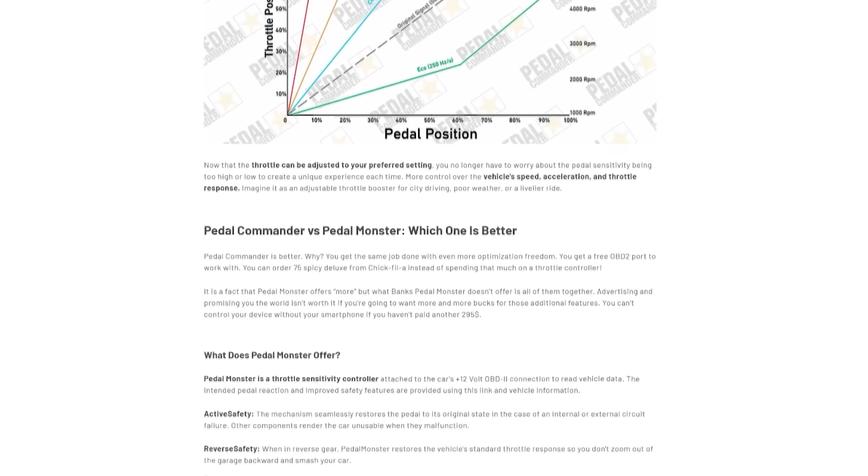And that's where the similarities end. Let's take a look. Well, first thing I notice is he's trying to make this look like an impartial comparison on his website, like it's Car and Driver or something. He's listing our features and their features.

All right, game on. So reading down their page, I come up with this: it is a fact that PedalMonster offers more. Well, now there you are. He's acknowledging it. Absolutely, it is a fact that PedalMonster offers more, but what PedalMonster doesn't offer is all of them together, whatever them is.

Okay, advertising and promising you the world isn't worth it if you're going to want more and more bucks for those additional features they come with.

It's all for $295, including the phone app. Oh my God, what is he talking about? You can't control your device without your smartphone if you haven't paid another $295.

You're going to control your device with your smartphone. That's what we do today.

What is this? You can order 75 spicy deluxe from Chick-fil-A instead of spending that much on a throttle controller.

For $295, you get PedalMonster limited only to your smartphone for control. Only if you pay another $295. This is English as a second language. He's got the dollar sign after the number.

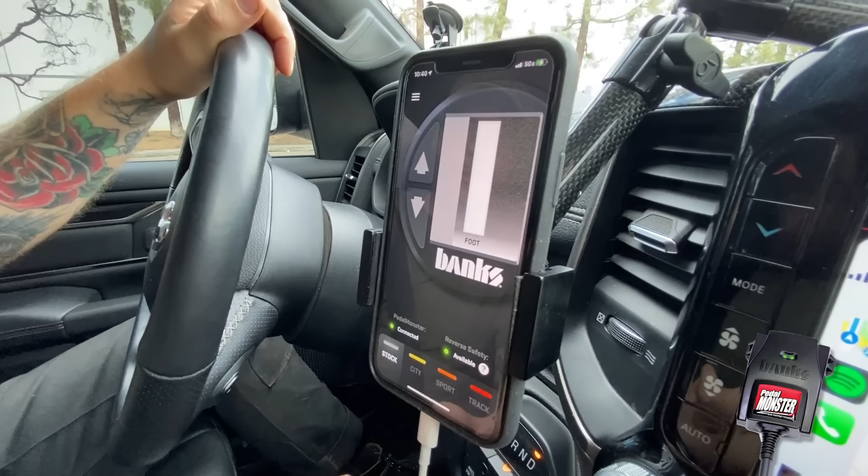I think this whole diatribe has to do with the fact that they've got buttons. So to get to the buttons, this has to be glued to your dash somewhere. We chose not to have buttons, so you wouldn't have to plaster this thing to your dashboard. It's hideaway. We chose to control it with your phone or with an iDash, your option.

These guys are jackasses. Most users choose Pedal Commander over PedalMonster because it is much easier to install. That was bullshit.

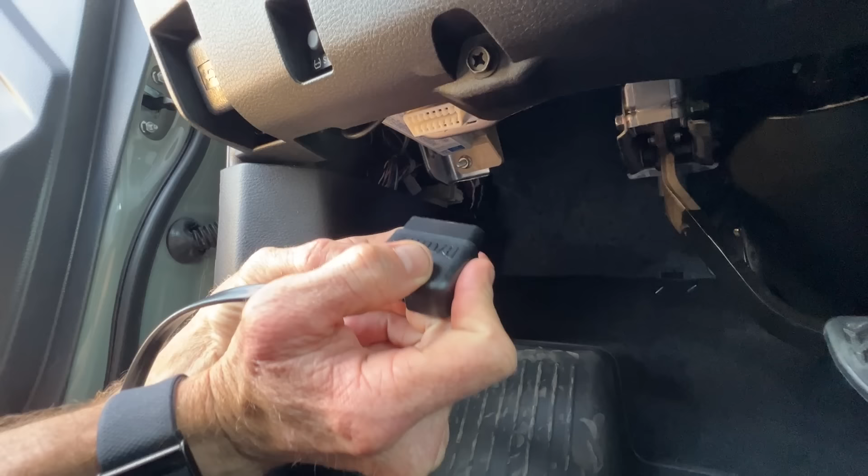Pedal connection, OBD connector, looks pretty simple to me. With PedalMonster, you must route the included long OBD2 cable to a place where it won't snag, which is a chore, they say. Pedal Commander is much easier to install. The installation of this whole damn thing is probably 8 to 10 minutes. If plugging in an OBD cable is too much for them, I'd be worried about the circuitry in their box.

So reading down their page, I come up with this: Pedal Commander is better. Why? You get the same job done with even more optimization freedom. What the hell does that mean? And you get a free OBD2 port to work with. That's not an advantage.

Why is OBD such a big deal? Well, OBD gives us reverse safety, returning the pedal to stock when you're in reverse so you don't back through the garage door. I bet you they purchased some garage doors for their customers. To the highest notches. Whoops. Yeah, it might be a little dangerous.

The fact that we're on the OBD connection gives us vehicle identity, so we know year, make, model, transmission, on and on and on. This allows us to fingerprint the vehicle we're on. Now we can have a custom calibration for your specific car or truck. And if you want a free OBD port, we've got splitters. They're easy.

OBD also gives us low-speed trim, so you can limit PedalMonster sensitivity below 10 miles per hour. This is great for preventing wheel spin, and it's wonderful for towing. This guy has no OBD connection. It doesn't know what it's in. Hell, you could probably connect it to a riding mower. It wouldn't know.

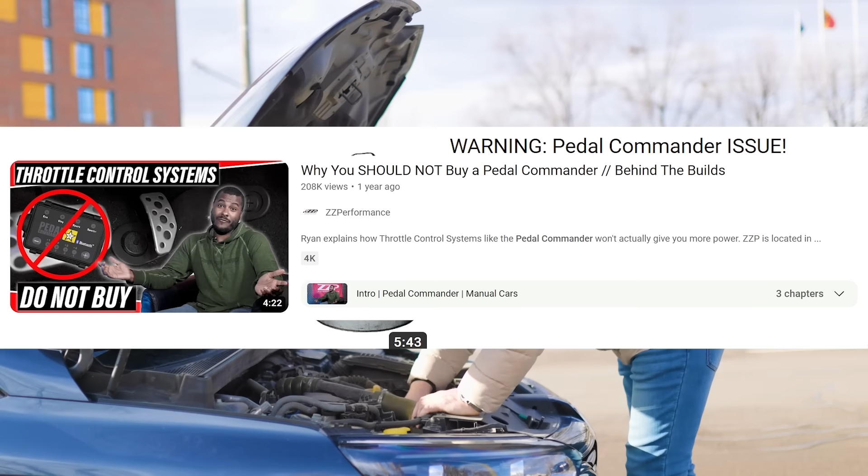When we first came into the market, we saw that these guys were getting all kinds of comments online about kicking trouble codes. Why was that happening? We bought one and found that they're leaching 5-volt power off of the instrumentation circuit, and there's not a lot of current overhead there. So we decided to go to the OBD connection and get fused 12-volt power right from the battery.

Let's read on: Pedal Commander doesn't cause voltage shorts. Only small amounts of milliamps are being used. Your throttle would still have plenty of overhead power.

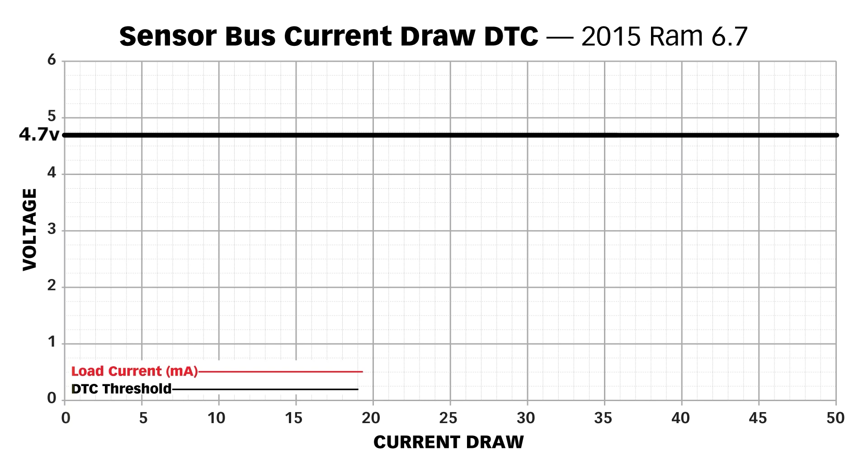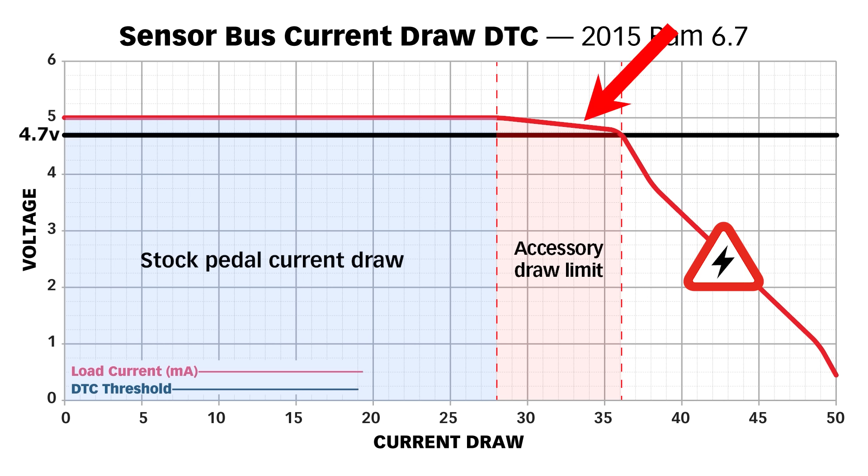Milliamps? Let me talk you through this graph, I think it'll help you understand what's going on. The blue area is the stock current draw for your pedal assembly. The pink area is the draw limit, and the white area is circuit overload. The black line indicates the voltage required to operate the circuit, about 4.7 volts. The red line indicates the voltage available to operate that circuit. Everything's happy here until you get up to about 28 milliamps of current flow, which is all the stock system draws, and then the voltage starts nosing over. Then along comes Pedal Commander, and they push the current draw beyond the safe limit.

So if you don't believe our test results, maybe you'll believe their customers.

This happened at the exact moment that I changed from city to sport mode on the Pedal Commander. I have no idea what this thing is doing, it's like it's accelerating on its own. We've got the check engine light on, the truck just said engine power reduced. Maybe this Pedal Commander wasn't a good idea.

I'm parked right now on the parkway. I almost crashed, you can see the cars coming. I kind of got scared because the car was not responding to my foot. It's definitely connected to the Pedal Commander. Just one scare like that is enough, and more than that, your life could have got ruined.

My truck just flashed every warning light, check engine light, throttle position sensor. I am never putting this back on the truck because that was super scary.

You start setting trouble codes, the ECM deactivates your pedal, you're coasting in the fast lane, you come to a stop, and you get nailed from behind.

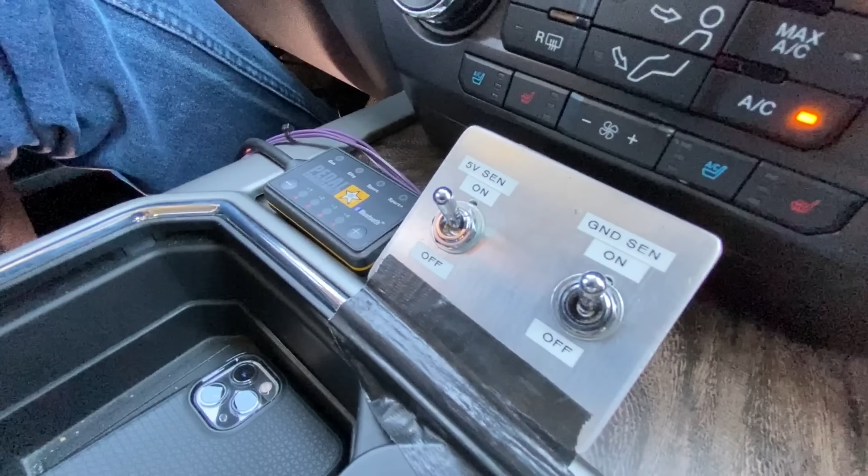To be thorough, we tested this failure ourselves. The guys rigged one of our trucks with a pair of kill switches, one for the 5-volt pedal circuit and one for the 12-volt power from the OBD connector. Now we can kill the power to both the Pedal Commander and PedalMonster to see how they respond. Here we go.

Get up to about 30, still accelerating. Hit the switch. Nothing. Engine's gone to idle, there's no pedal whatsoever. Hill descent fault — what the hell is hill descent fault? Service? What about service, see the manual? Oh my God, oh, nothing.

All right, we've changed to the PedalMonster, here it is right here. Internally on the circuit board, we have a 12-volt to 5-volt DC power supply that powers the entire circuit board. So let's see what our watchdog circuit and our active safety is all about.

Here we go, we're going to accelerate to about 30, and I'm going to kill it. And here's a guy who's thinking about pulling out in front of me. Kill it. Whoa, I've still got throttle, still punches. All right, PedalMonster off, on, off, on. Well, there you are — that's what active safety, that's what Watchdog, and that's what failsafe is all about.

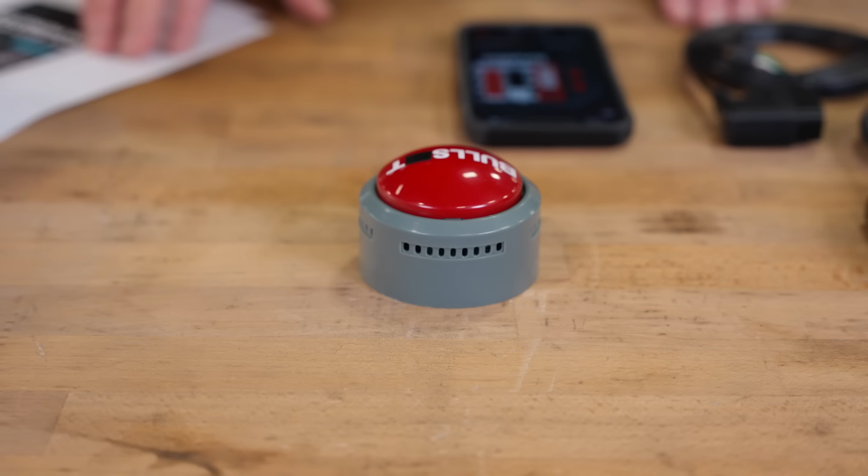So let's bust them apart and take them into Rick in the lab.

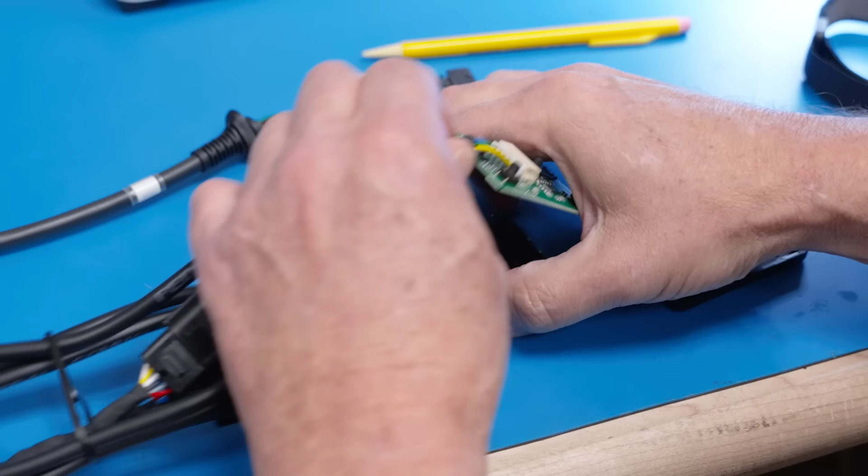So we've opened up both of these units. I have the Banks PedalMonster on top and I have the Pedal Commander on the bottom. I want to show you some of the differences between these.

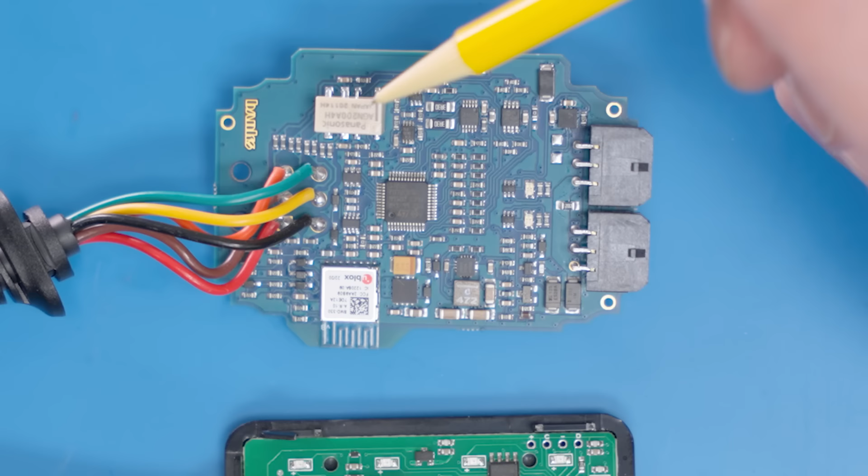One thing that stands out is we have this relay here, this beige box. This gives us a great safety feature, a positive failure mode. This active safety mode is very important. If this board were to fail, this relay will close and revert to stock operation. Looking at the Pedal Commander, I don't see any such feature. There's no relays, no passive safety, no active safety. When it fails, you're in danger of losing your throttle pedal.

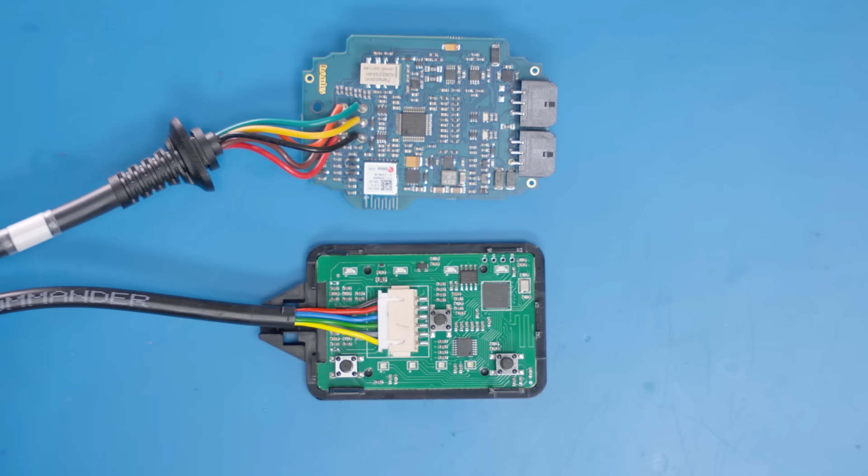Looking at the PedalMonster, you can see we have a CAN bus interface IC right here. The CAN bus is the controller area network, the data bus inside your car that runs the entire vehicle. Because we interface with the CAN bus, we have a lot of intelligence in our module. It knows the type of car, the year, the make, the model. It knows what transmission, what engine, what gear you're in. These are great things to know.

For example, if you put your vehicle in reverse with the Banks module, it reverts to stock performance so you don't lunge backwards in reverse. The Pedal Commander has no such CAN interface and therefore has no idea what gear you're in or even what type of vehicle you're in, or if it's even in a vehicle. From an electrical engineering standpoint, there's no comparison between these boards. The Pedal Commander is simply inferior.

What is the cost? Ours is $295. I assume they're probably undercutting us, selling it for around $200. $299? Wow. The point I'm trying to make is the most elemental one: this is cheap to make, this isn't. Hello, what is this?

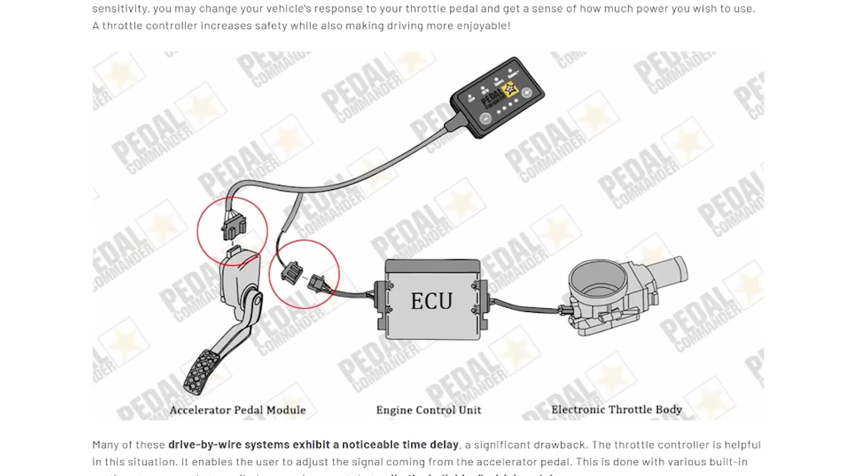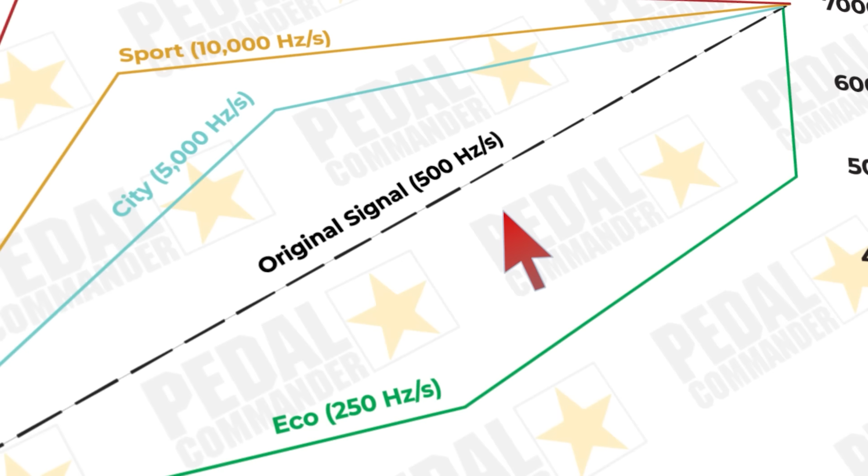What is this little graph on the page here? I got to put on my cheaters. Okay, it's pedal position to throttle position. It's a graph showing 0 to 100% pedal position on the bottom, and 0 to 100% throttle position on the left side. This dashed gray line is apparently the original signal, and it says 500 hertz per second. That's English as a second language all over again. That's 500 cycles per second per second. We just say 500 hertz. If you're going to say hertz, say hertz.

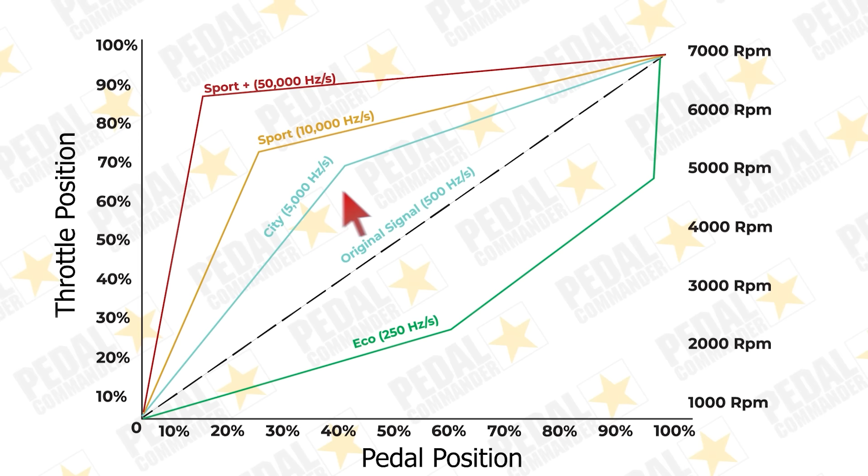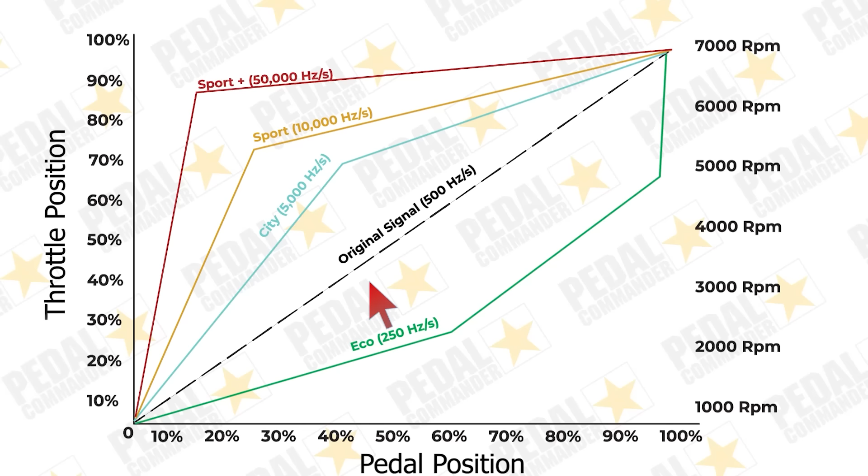But why are we describing an electrical 0 to 5 volt signal with a frequency in the first place? What does it say about City on their web page? 'Gives you a more active linear throttle response, perfect for everyday driving. This offers you a response of an old school throttle cable, a 1-to-1 pedal to throttle acceleration ratio.' Okay, 1-to-1. Well, he just described the stock trace that he's got on here, which is basically 1-to-1. The City mode is not 1-to-1. It's a different ratio, if you will. No way it's 1-to-1. God.

Now let's look at sport mode. Sport is way more aggressive, you can see that. How do they describe it? 'Our spirited driving mode, not for the light-hearted. This is our highest suggested mode for around town driving. 70% faster signal than stock.' Oh, I get it, that's what this frequency is all about. Like they're speeding up the speed of light or the speed of the electricity. You can't change the speed of electricity, period.

Warning, bullshit alert. All right, looking at sport again, there's no smooth transition, these are not contours. These are brutal, straight line, a knee or transition point, then you're putting your foot into the bucket of mud all the way to 100%.

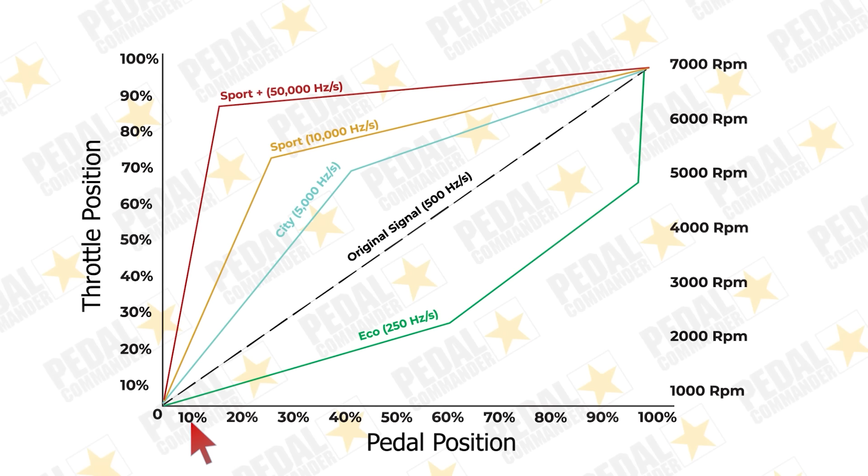It really gets good when you get to their Sport Plus mode. You've moved the pedal 10% and you've got 85% of the throttle opening. So from 10% to 100% pedal, all that additional 90%, you're only getting 15% more throttle opening. You basically touch it and you're all done. No way you call this a curve. You get to that knee, and let's say you're pulling a grade. If you're at or around that knee in the throttle response, I'm telling you, you're going to have shift happy in spades. God forbid you've got a Toyota Tacoma going up in the mountains with a Pedal Commander. You guys know what I'm talking about.

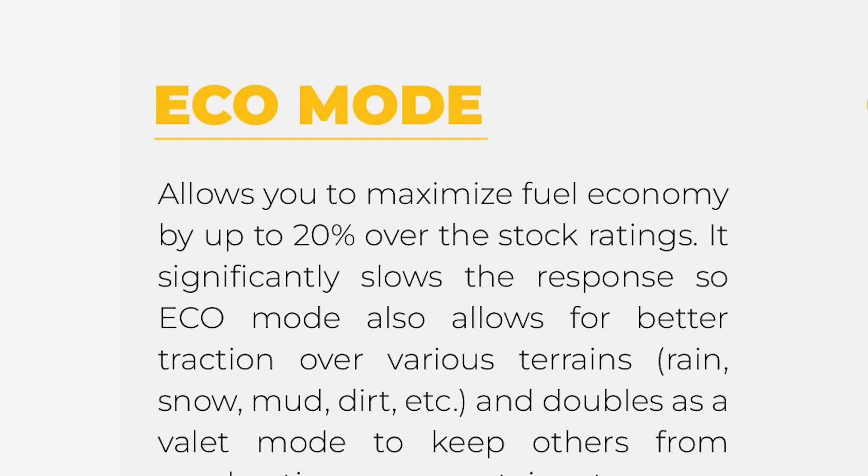Now let's look at the green trace. Eco mode allows you to maximize fuel economy by up to 20% over stock ratings. No damn way, that was bullshit.

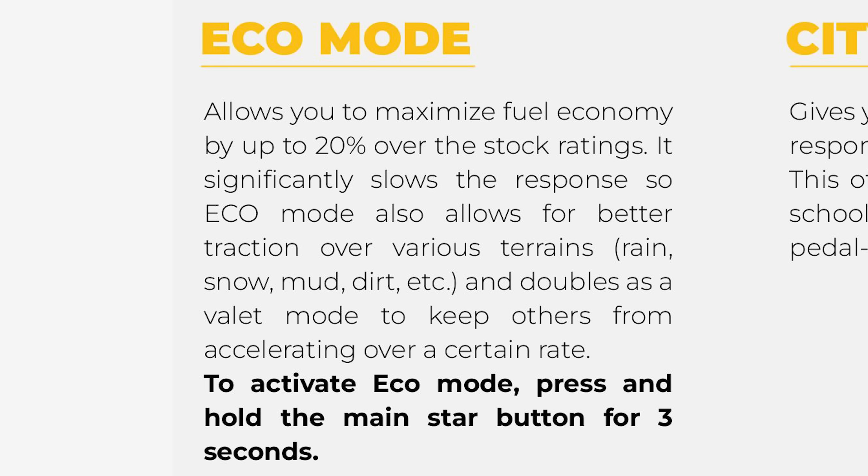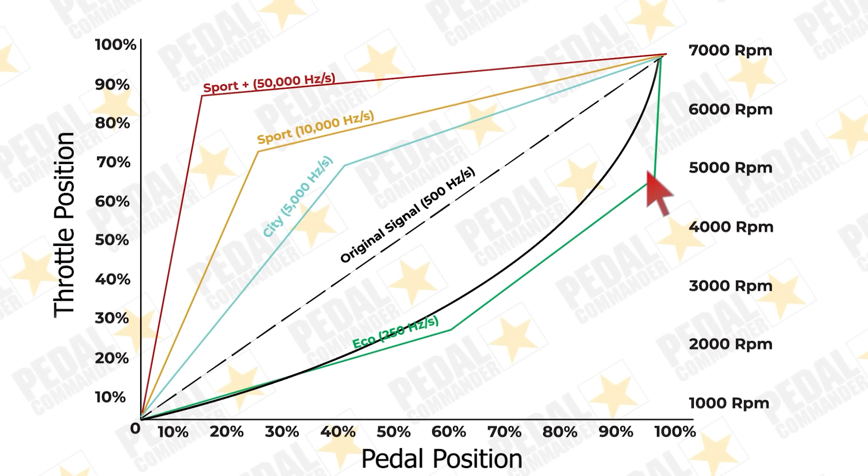It significantly slows the response, so Eco mode also allows for better traction over various terrains, rain, snow, mud, dirt. We didn't do this for a couple of reasons. If you want Eco mode, you might as well just go back to stock. Stock is actually shaped somewhat like they've shaped this green trace, but stock is not as they represent it. It's got a belly in it, and you feel that belly. But there's a second reason.

There's a program we run when we're developing any kind of mission-critical electronics called Failure Modes Effects Analysis, FMEA. We ran that program on the Eco mode idea, and it really popped out real quick. Imagine how this would be: you're pushing in Eco mode, you need some right now, and it fails. Say you're at 80% pedal position. Now you're going to go to what you'd have stock at 80% throttle, which is a hell of a lot, and you're going to drive right into the guy in front of you. So we elected not to include this because it's dangerous.

Before we designed the Banks PedalMonster, I had the guys go out and buy every throttle controller on the market. We fingerprinted them, and lo and behold, every one had a graph that looks just like this.

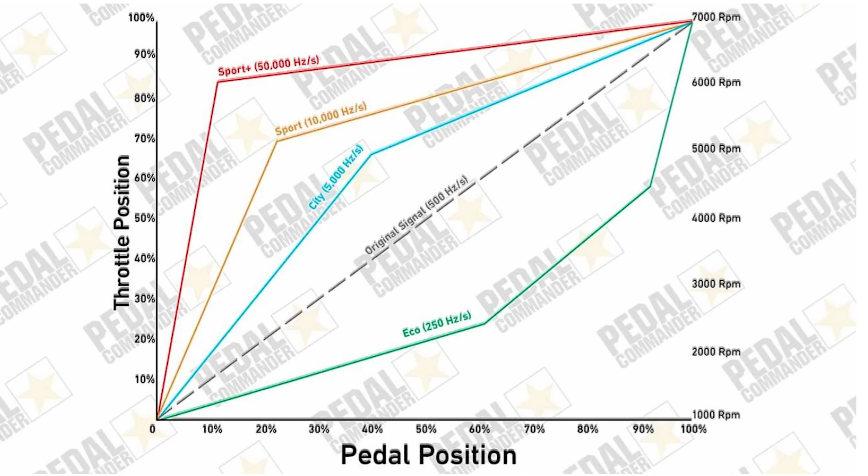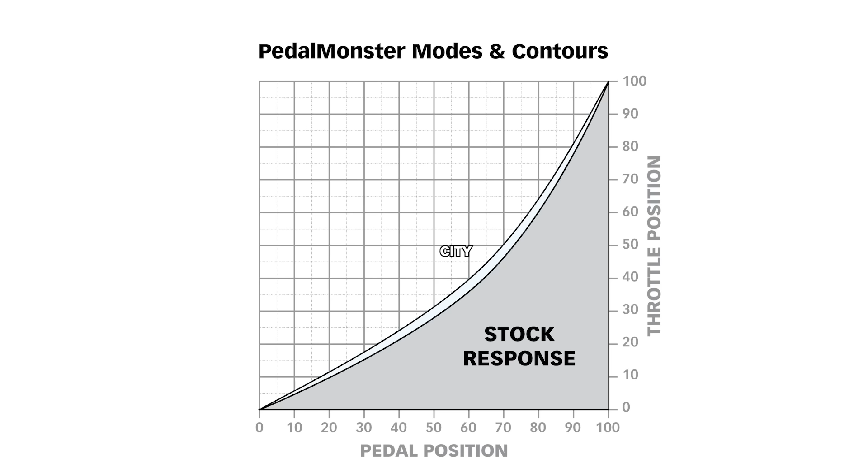We didn't just casually draw some straight lines. I drove them for weeks—Mustangs, Corvettes, trucks, diesels, gasoline, everything, stick shift, automatic. Those 30 curves are silky smooth no matter what vehicle you're in.

All right, so let's see what other gems we can find on this website. Here we go. Pedal Commander's headquarters are in Camarillo, California. Bullshit detected. That's BS. They have made their product at their headquarters in Turkey since 2011. It's on their website. Camarillo is an outpost.

No matter what their site says, Pedal Commander is manufactured in Turkey, and Banks PedalMonster is manufactured right here. Isn't that right, everybody? That's right, yeah.

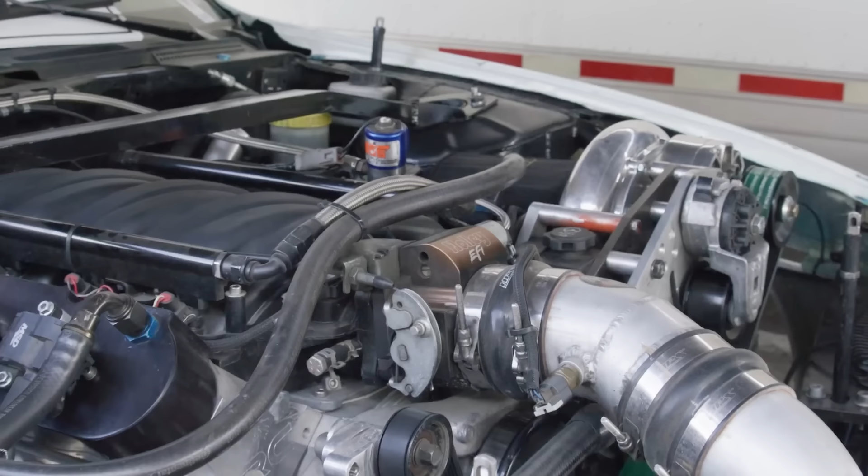Let's read on. Pedal Commander is battle tested. If you are a Formula Drift fan, you probably saw the Pedal Commander Nissan S14.9 win Pro Spec at St. Louis at the hands of Evan Bogovic. That Nissan has a supercharged LS under the hood with a cable-driven throttle.

That is some bull. There is no Pedal Commander product driving that throttle. Incoming bullshit, take cover. The only thing that's battle tested on this car are the graphics on the side of it.

If you want to talk battle tested, I'll give you battle tested. Banks has supplied engines to the military since 1975. Today, we are the sole supplier of the engines for the new Joint Light Tactical Vehicle program—we've delivered about 24,000 of those engines. That's battle tested in actual battle.

Clearly, we've rattled Pedal Commander's cage, so much so that they've created a cheap new brand just to come after us. It's called—I don't know if I should say, my wife's gonna kill me.

Tuned. It's the same device with less functionality. And remember, they were giving us crap about not having buttons? Well, this thing has no buttons.

Now, how do I know that this is a Pedal Commander product? Same office in Camarillo—it's on the website. That's how I know. And you know what really pisses me off? On the Tuned box, the face of the box is an American flag, and the product is made in Turkey.

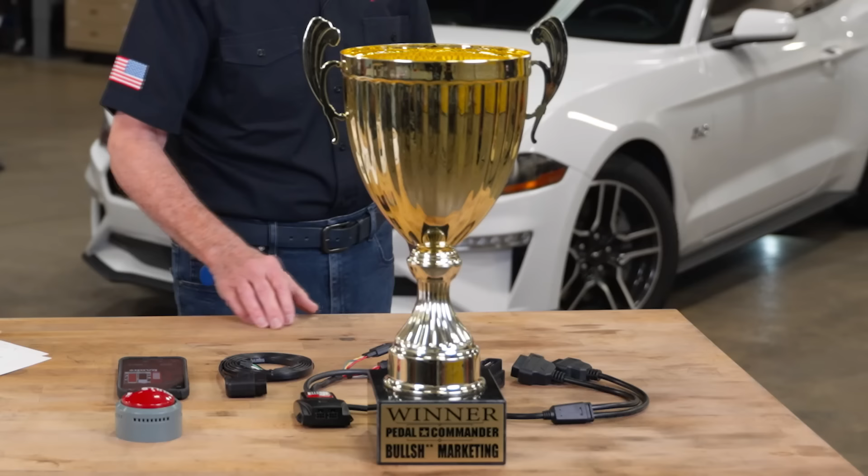Incoming bull detected. I think all this bullshit deserves an award. And the winner for bullshit marketing goes to Pedal Commander. I wonder where I should send that trophy—Camarillo or Turkey?